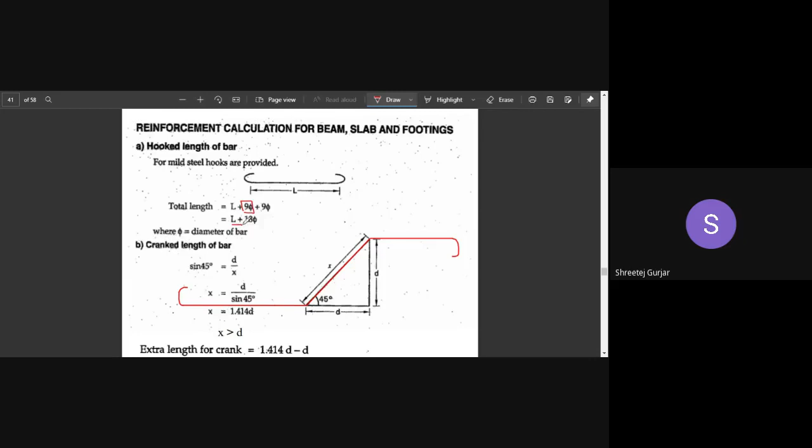Remember the length of a bar, a straight bar. It is the length of this thing, plus the length of these two hooks. The length of each hook is 9 times the diameter, into 2 because we have two hooks. So the total bar length will be this length plus 18 times the diameter.

Keep in mind this 18 times diameter is required for both sides, for the hooks on both sides.

Then there's extra length because of this cranking. That extra length equals 0.42d. Remember 0.42d, the extra length required because of this cranking up. If you have a two-side crank, then it will be 2 times 0.42d.

Then we have this for the length of your stirrup. It will be 2 times (a plus b). A is this, b is here; a is here, and b is here.

Then this 24 times diameter is your overlapping, for overlapping because of this extra thing you need to do so that your stirrups do not open up. So this is 24 times the diameter of your stirrup.

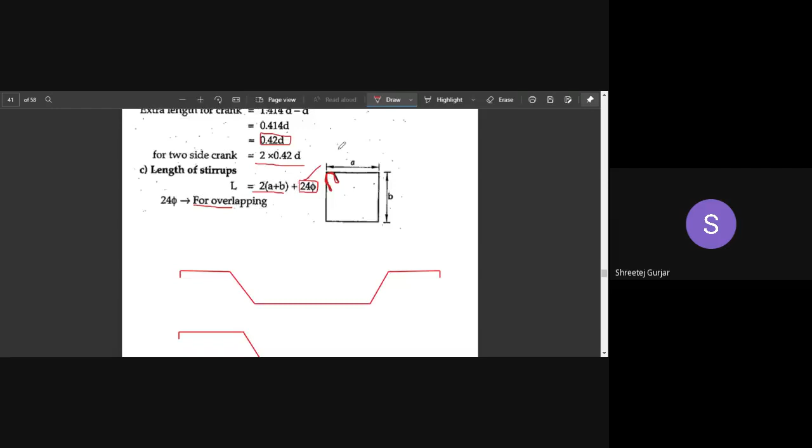So remember this: 18 times diameter, then 0.42d, and 24 times your diameter. Remember these three things that we will be requiring now.

This is your double-sided cranked up bar. Double-sided cranked up bar. This is your single-sided cranked up bar, where only one side is cranked.

In the previous class we discussed this numerical, that is a simple beam. Now we will look into this T-beam.

In figure 1.44, this figure shows a typical RCC beam. This is the longitudinal section. We need to calculate the steel required for the beam diameter wise, and we'll also look into the calculation of quantity of concrete.

They have given us the weight of each diameter bar, weight per meter of each bar, so no need to calculate. Our usual step was d square by 162.2 to get your weight per meter. So that's no need here since they have directly given us the weight in kg per meter of each bar.

They may give this or they may not give this, so you need to remember that formula, d square by 162.2.

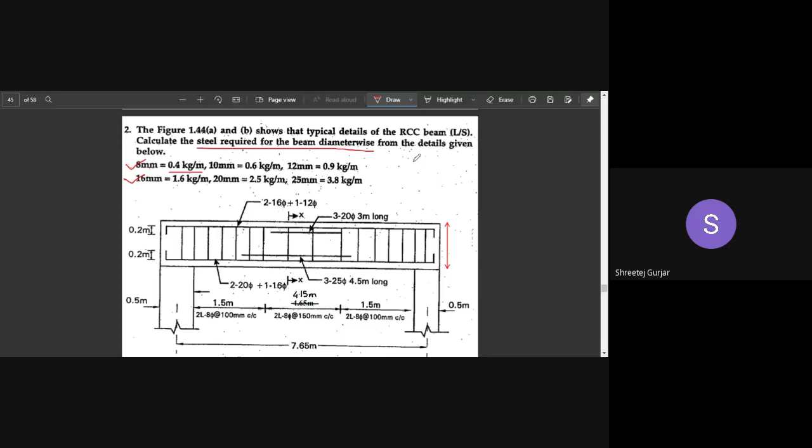Let us look into this cross section and the longitudinal section of your beam. This is a longitudinal section, this is our cross section. You can observe, this is your beam, and we have this bar.

At the top these are usually your hanger bars. Hanger bars at the top: they are 2 bars of 16 mm diameter and 1 bar of 12 mm in diameter.

Let us look into the cross section, you will understand. So 2 bars of 16 diameter are here at the ends, one here and one here, and 1 bar of 12 mm diameter is at the center.

So we are done with this bar. Coming to our bottom bar, this bar is also straight, no cranking up. It is 2 bars of 20 mm diameter plus 1 bar of 16 mm diameter.

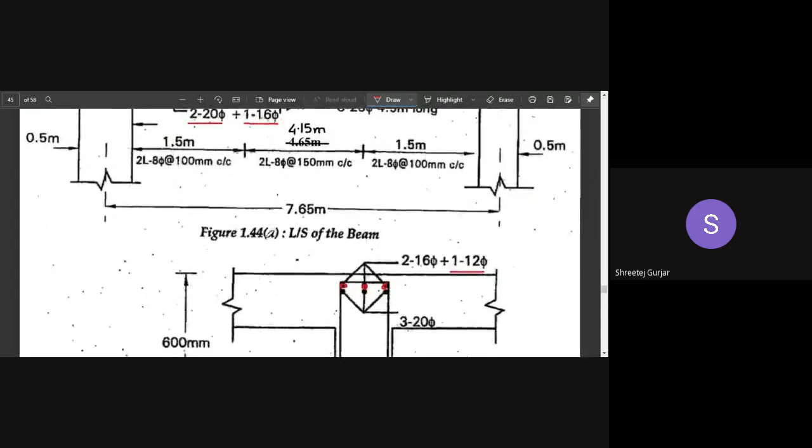Similarly we are arranging: 2 bars of 20 mm diameter are arranged at the sides, and 1 bar of 16 is arranged at the center, placed at the center.

The overall depth of this beam is 600 mm, including the covers, and the width of your beam, including covers, is 230 mm. So this is regarding our cross section.

We can see we have these extra bars: 3 bars of 20 mm diameter and 3 bars of 25 mm diameter, which are straight bars. At the top we have 3 bars of 20 mm diameter, but they don't go throughout the beam - they are only 3 meters long, starting from here, ending here.

At the bottom also you can observe we have this bar, 3 bars of 25 mm diameter, and it is 4.5 meters in length. They don't go throughout, they are only placed here, because at the central span we have more stresses.

Coming to some beam dimensions: this overall depth is 600, as you have seen in the cross section. Then this bearing - you can observe it is 0.5 meter on this side, and also this support or bearing is 0.5 meter.

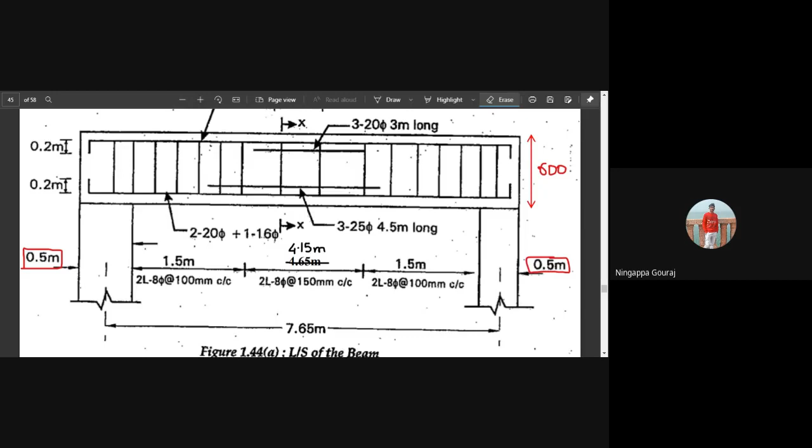Any idea? The load is transferred at end sections. Sorry, I didn't get you. At the end of the beam, sir, load will be transferred more, sir.

Yes, exactly. So at the supports, your shear force will be more. So what we need to do is provide extra reinforcement here, so the spacing is less. At the center span, the shear force will be lesser compared to the support, so spacing can be increased over there. You could provide the same spacing throughout, but it will not be economical. By varying it, we can save some reinforcement.

What we do is change our reinforcement spacing. At the center, the spacing is more, and at the edges, the spacing is different.

That spacing is mentioned here. You can observe the stirrups here are two-legged, 8 mm diameter bars, with spacing of 150 mm center to center. It starts from here and ends here.

At the edges, I mean at the supports, the stirrups are two-legged, 8 mm diameter, with spacing of 100 mm center to center. Starting from here and going up to here - that is your stirrup, starting here and ending here. So, 100 mm at the supports and 150 mm at the center.

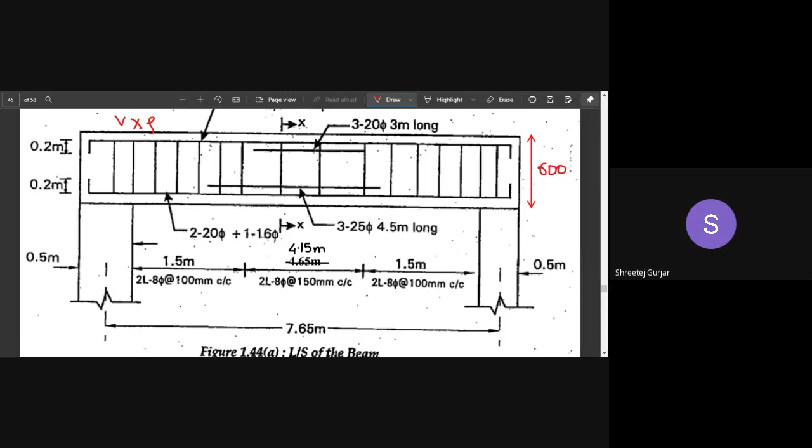Now next we need to calculate the length of your stirrups and the number of stirrups required. If you do all of these things I mentioned, this numerical will be over - you need to calculate all those things and prepare a bar bending schedule. So that is regarding this numerical. Let us look into detail how we do all those things.

Top and bottom cover is not given. So in the previous numerical also, the top and bottom cover were not given, so usually we assume a cover of 25 mm for beams. Similarly here also, we will assume a cover of 25 mm. You can observe here, 25 mm cover we have assumed, because this cover is not given.

So next thing we'll look into. I hope the cross section is clear. So this cross section is at XX, meaning the cross section is at here. XX section is over here.

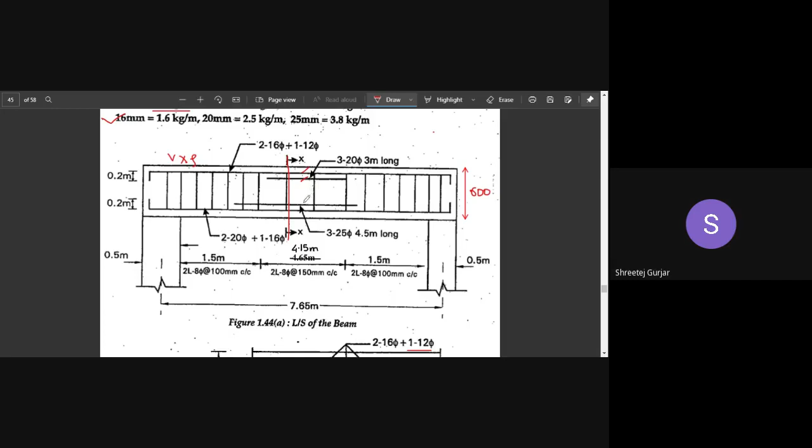So it will include your top bars, this 3 meter extra bar at the top, 4.5 meter long extra bar at the bottom, and this main bars. So all of this is done. I hope this section is clear. So moving on to the solution.

Moving on to solution. So length of the straight bars, I have told you we need to calculate the length of straight bars. So at the bottom and at the top, both are same, no cranked up bars. So directly you can calculate the length of your straight bar.

Let me just show you over here. So length of straight bars starts from here and ends here. So this center to center, we have 7.65.

So we need to add this bearing, half of this bearing over here, which is 250 mm, and then half of your bearing here, that is 250 mm we need to add. Then you need to minus this cover, minus this cover over here 25 mm, minus this cover over here 25 mm. So we'll get your straight length.

Then what you need to do, you need to add this hook length, that is 0.2 over here and 0.2 over here. So you get the total length of your bar. So that is what is given over here.

7650 center to center length plus your two bearings, then this is for your cover, reduction for your cover, plus 2 for your 2 into 200 for your hook length, which they have given. So you get the total length of a straight bar as 8.5 meter. So this is done.

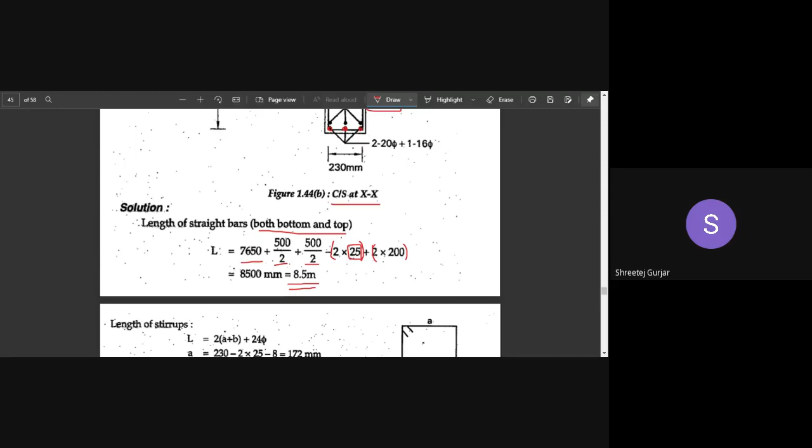Then top bar and bottom bar are same, so length of your bars are the same at the top and bottom. So we are done with this. Now the main thing is length of your stirrups.

So it will be length this A, and then this is B. So 2 times, A is 2 times over here and B is also 2 times. So 2 times A plus B plus 24 diameter, 24 into diameter of your stirrup, that is for this hook length.

So this A distance will be minus your cover, minus your cover and half of your diameter minus here and half of your diameter of a stirrup over here. So width of my overall beam is 230 mm, as seen in the cross section, and then minus 2 times cover on each side, minus cover over here, minus cover on this side. And then half of your diameter you need to reduce over here.

Half of your diameter you need to reduce here because A and B are center to center length, they are center to center length. So you need to consider from the center of your stirrup. So it will be minus 8 by 2 and minus 8 by 2. So directly they have written minus 8. So A is 172.

Similarly, B you can calculate, starting from this and ending at here, center to center length. So it is 542. Then you can calculate this length of your stirrup, so it is 1.62. By substituting in this formula, you will get this 1.62 meters. So length of stirrup is done.

Now the next thing that we are left out with is the number of stirrups, the last thing. So I've told you need to calculate separately for your center span and then separately for your supports.

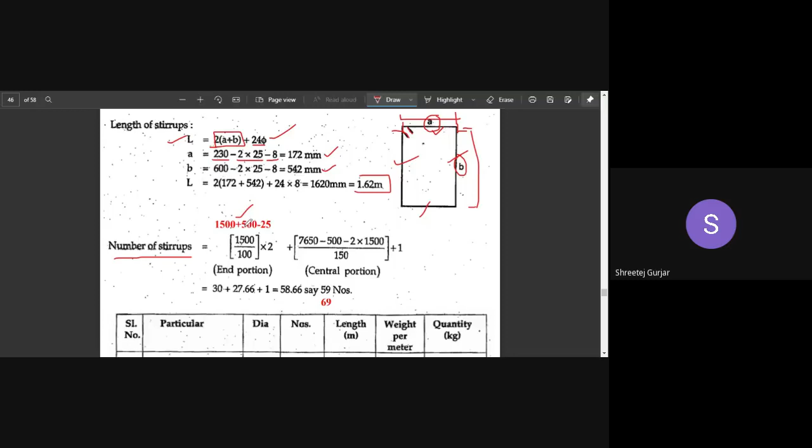So this is for a center span. Sorry, this is for your supports. This is for supports, and not for center span. This is for a center span.

So let me just show you here. The length will be starting from here. For your supports, the stirrups will start from here and end over here. So you need to calculate this length, starting from here and here, ending till here.

So we know this is 1.5 till here, 1.5. So you need to add this bearing length, that is 0.5, and then reduce your cover. So you will get your length that is required for your spacing. Then this is on one side, and you have same thing on the other side.

You have the same thing on the other side, so you have to multiply that by 2 because we have one side over here and a second one over here. So the length will be 1.5 plus 0.5 minus 0.025, that is your cover minus your cover. So 1500 plus 500 minus 25. That is your length into 2, right? Divided by the spacing, and then you need to multiply by 2 afterwards.

So that is the length of your stirrup spacing, and then the spacing which is given, S, is 100 mm. So this length which we have calculated, you have to divide by 100 mm, and then overall you multiply that by 2. So you'll get the number of stirrups. That is what we have done over here, right? So do not follow this, use this over here.

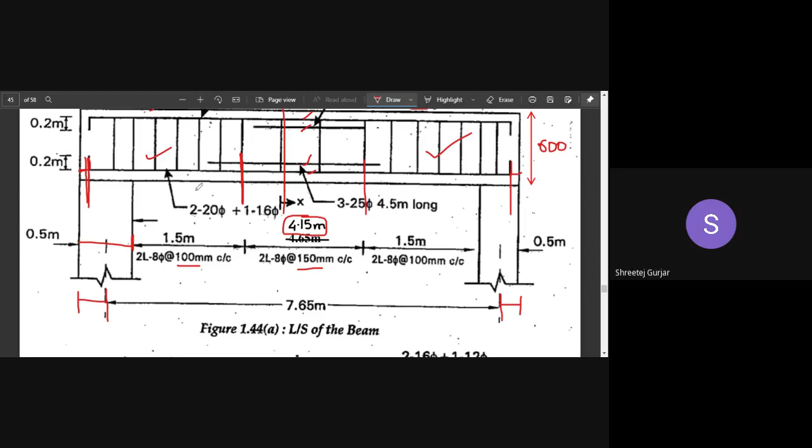4150, and then divide by 150 mm, which is your spacing, right? So the length is directly given here, this is the length, and then divide by the spacing that is there. No need to multiply by 2 because it is only 1. So divide by 150, and then you need to add 1. You need to add 1 compulsorily whenever you want to calculate the number of stirrups.

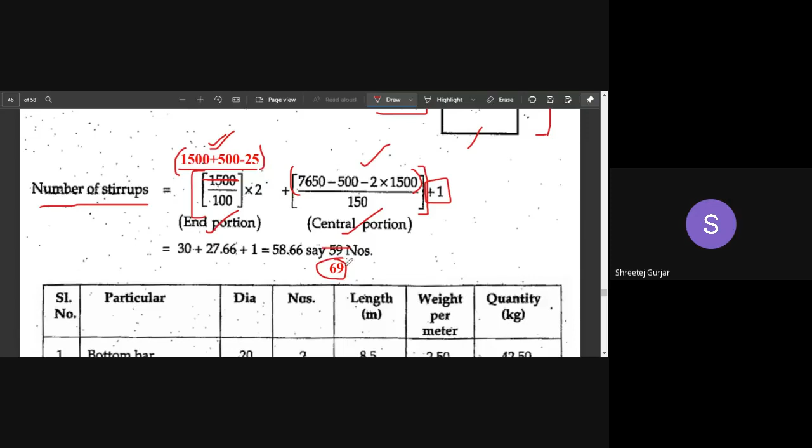So the number of stirrups you get is 69, okay, not 59, because they have used 1500, which is wrong. So if you use this, you will get the number of stirrups as 69. We will use 69 number of stirrups.

So moving on to the table, I hope all the calculation is clear. If you have any doubts, if you want me to explain any of the things, please let me know.

So the next thing is preparing your schedule. Your top bar and your bottom bar are same in length, but the diameters are different. So we'll start with the bottom bar.

2 number of 20 mm diameter bar plus 1 number of 16 mm diameter bar, that is placed at your bottom. We will write separately for diameter, like this: 20, then 16. The larger one you write at the top, and the smaller diameter one you write at the bottom. At the ends you have 2 number of 20 mm diameter, and at the center you have 16 mm diameter bar. So this is at the bottom.

Then the length we have calculated is 8.5, and the weight per meter is directly given in your problem statement, so you write that over here. Then when you multiply number into length into weight, you get your quantity in kg. Similarly for this 16 mm diameter you can do the same.

Then for your bottom extra bar, there is one extra bar, which is 4.5 meter in length, which you can see in your longitudinal section. Diameter of that bar is 25 mm, and 3 number of bars are provided. This is also given, so you can get the quantity in kg.

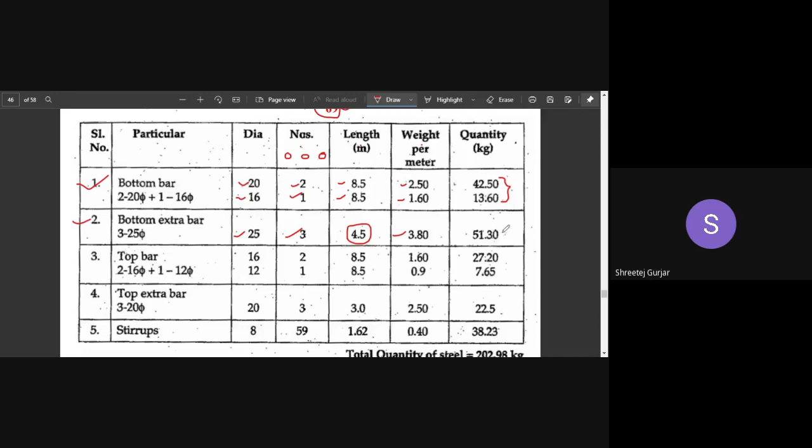So after we have done with the bottom bars, we can go ahead with your top bars. We will calculate for top bars similarly: 2 bars of 16 mm diameter at the ends, and 1 bar of 12 mm diameter at the center.

So diameter you write the number, and this is your length of the bar, and this is the weight per meter which is given. You can calculate this. Then top bar, 3 bars extra at the top we have been given at 20 mm diameter, 3 bars of 3 meter in length. Then stirrups we have calculated, number of stirrups is 69, and this is 8 mm diameter stirrup, and the length of each stirrup is 1.62. This is the weight per meter. You will get all these quantities in kg.

Summation of all these quantities will give you the total quantity of steel that is required. It is 202 kgs, okay, for one beam you can observe, for a single beam of almost 8 meter span, 8 meter length, so the steel that you require is 200 kilos. So this is a numerical regarding beam. If you have any doubts, please feel free to ask.

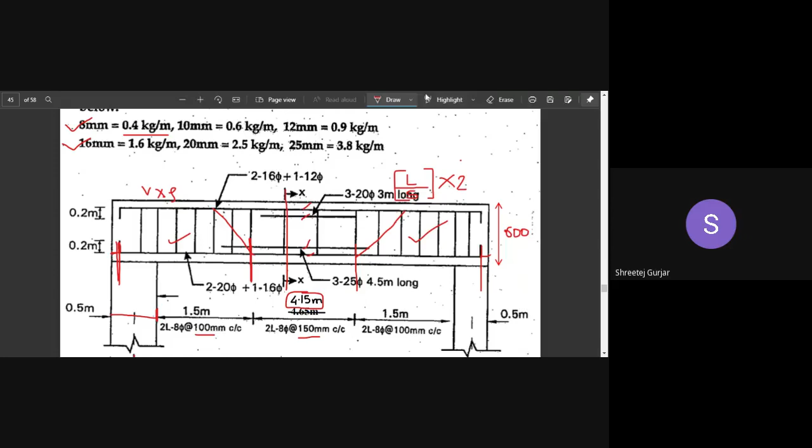Okay, so this is a very simple one wherein we do not have any cranked up bars, like we had in the first numerical. This is very easy when there is no cranking up.

So whenever you have a cranked up bar, you need to mention them separately. Do not forget to mention them separately. I hope this is clear.

So moving on to the next thing, we will look into the calculation of a slab, calculation of reinforcement in slab. This is very important, so engineers usually go for a slab checking.

Reinforcement checking for slab is done before the casting of slab concrete. Structural engineers who have given the structural design usually go for the slab reinforcement checking. So you need to be thorough with this, because it is very confusing if you just go through it.

You need to properly understand where these cranked up bars are, what is the length of these cranked up bars, what is the length of your cranking up. Then extra bars will be provided at some places, so you need to understand all those things. Initially it will be a bit confusing, but later on you will properly understand.

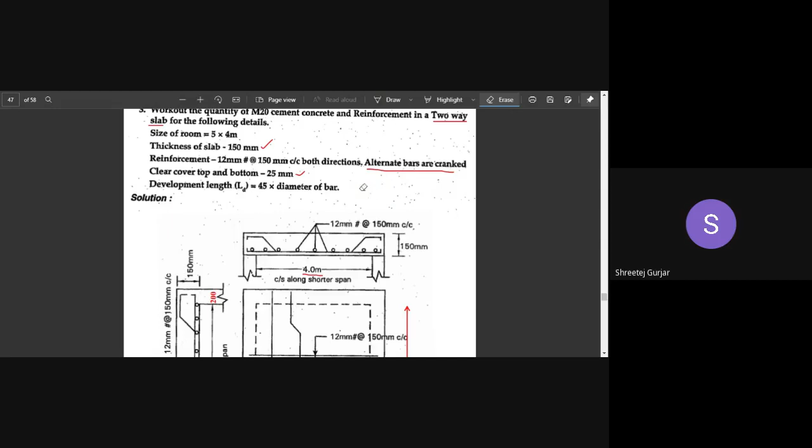I hope the problem statement is clear. Let me just explain this cross section. This is your plan view, and as I've told you, this is the reinforcement given along the longer span. The reinforcement given along the longer span is this, which I am drawing over here.

So alternate bars are cranked up. We need to calculate the length of this straight bar, and then we need to calculate the length of this cranked up bar - this is for the longer span. Then moving on to the shorter span - this is the bar provided along your shorter span, and alternate bars are cranked up here too. So we need to calculate the length of this straight bar, and we need to calculate the length of these cranked up bars.

So separately we need to calculate all of this, and then we need to prepare a table. No stirrups over here—obviously this is a slab, so no stirrups. So only your reinforcement bars we need to calculate over here.

So this is the cross section along your longer span. These bars will be at the bottom, and these bars will be at the top.

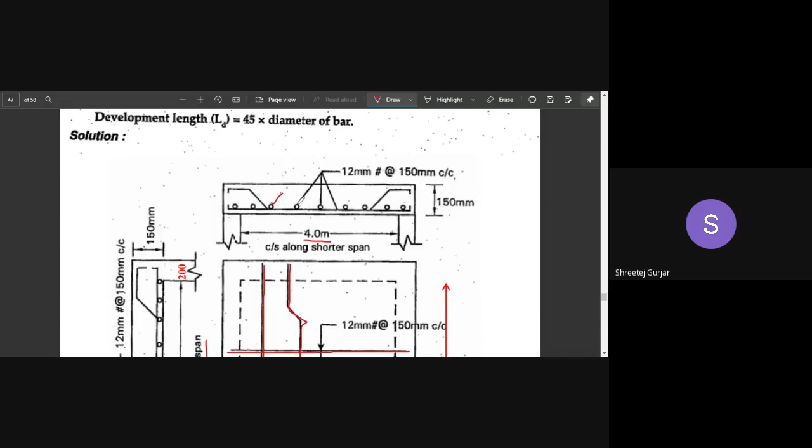And in your cross section of the shorter span, the bars which are going in the longer span will be seen in this circular shape, and the bars going along the shorter span will be seen as a straight line. I hope this is clear.

So moving on to the calculation part. They have mentioned we need to calculate the quantity of M20 cement concrete, along with your reinforcement.

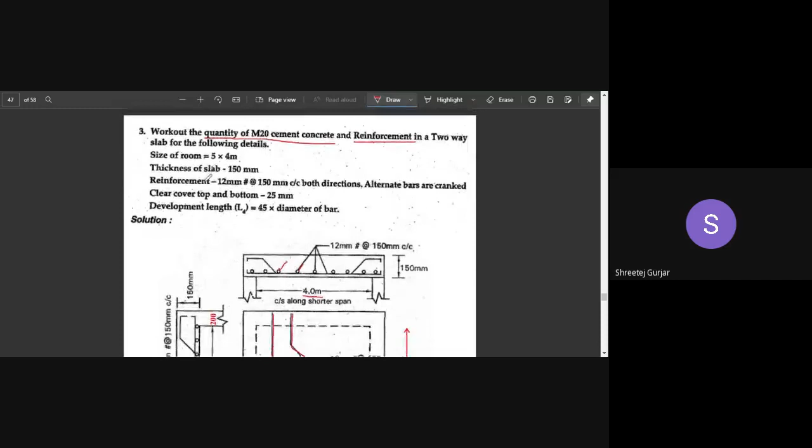First we will calculate the quantity of concrete, that is nothing but volume into density. The length of the slab totally is adding up your bearings, so the length will be 5,400. The breadth of the slab is 4.4 meters, and the depth of the slab is 150 mm, so this is not 0.5, it is 0.15.

So multiplying length into breadth into depth, and multiplying that by the density of concrete, that is 24 kilonewton per meter cube, you will get the total quantity of M20 concrete. So length into breadth into depth into density of concrete gives you the quantity in kg.

So moving on to the next thing, that is reinforcement bar calculation. First we will calculate the reinforcement along the longer direction. So what I've done is drawn this figure over here.

You can observe, so we need to calculate the length of these bars. This is your 5 meter length, which is the slab length, the longer length. So we need to calculate the bars which are along this longer length. Do not be confused whether we need to calculate this direction bars or the other—whichever is the longer length, that length we need to calculate.

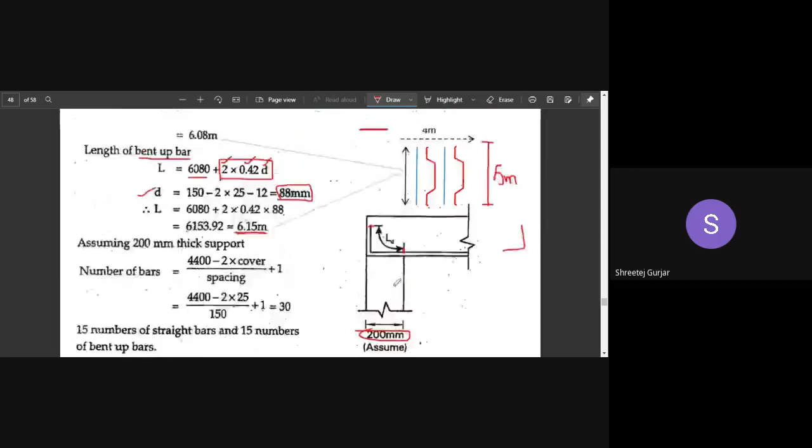So we need to calculate the number of bars, right? Along this way, we need to calculate how many bars can we fit. Okay, so we need to use 4 meter, right? We do not use 5 meter while calculating the number of bars. We use 4 meter because bars are placed along your 4 meter, not along this direction.

So spacing is 150 mm, right? They have given the spacing as 150 mm. So the overall length of your slab is 4 meter in distance, plus your bearings on both sides, right? 200 mm plus 200 mm. So 4 meter plus 0.2 plus 0.2 will give you 4.4. That is 4,400 mm is the overall length of your slab.

So minus the cover, right? Minus this cover over here and minus the cover on the other side. Suppose this is 4 meters, so minus cover on this side. So this overall length is 4,400 minus 2 times your cover, right? And divided by spacing, and plus 1 always, because whenever you are calculating number of bars, you need to do plus 1.

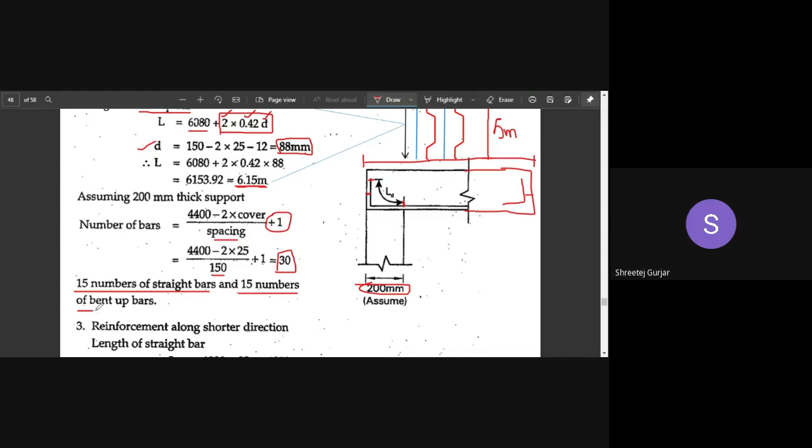So calculating, we get 30 number of bars are required. Okay, 30 number of bars are required. So total number of bars are 30, and in that 30, 15 number of bars are straight bars, and 15 numbers of bars are bent up bars. Okay, so I hope this is clear. This part is clear for your longer direction.

Similarly, we will calculate for shorter direction. Okay, similarly, we will calculate for shorter direction. So I hope this is clear. Calculation of your reinforcement along longer direction. So if you have any doubts, you can let me know.

Okay, so do not confuse this longer direction and shorter direction. If you understand clearly which bar you need to consider in longer direction and in shorter direction, rest of the things are same, just calculation part. But do not mix up this longer and shorter bars, okay, while calculating.

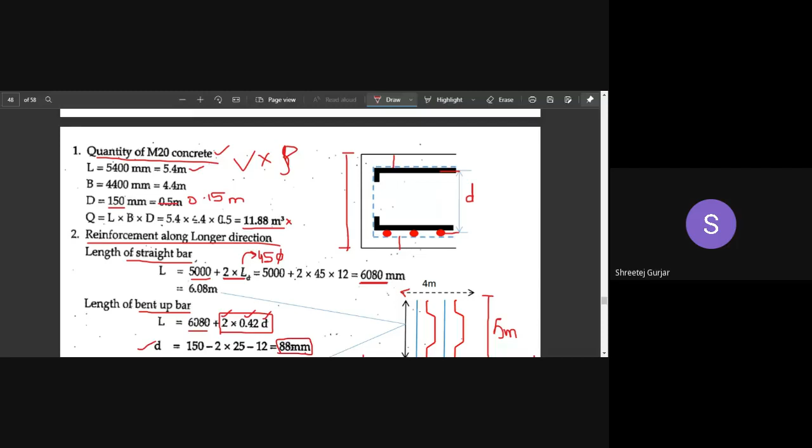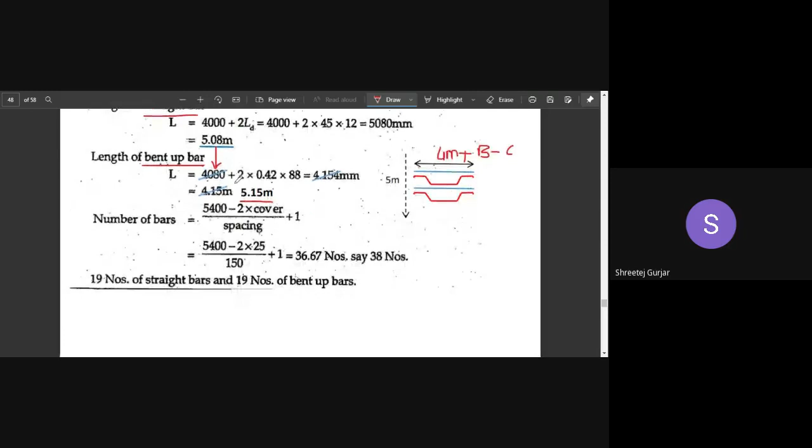So calculating the number of bars, we need to consider this length, that is 5 meters, plus your bearings on each side you need to add, that is 400mm, and minus 2 times your cover, divided by spacing. Spacing is 150mm, same as along your longer direction, plus 1. So we get 38 number of bars.

So half of the bars will be straight, and half of your bars will be bent up bars. So I hope this is clear. Moving on to your table calculation, or your schedule preparation - for longer direction you need to mention separately, and for shorter direction you need to mention separately.

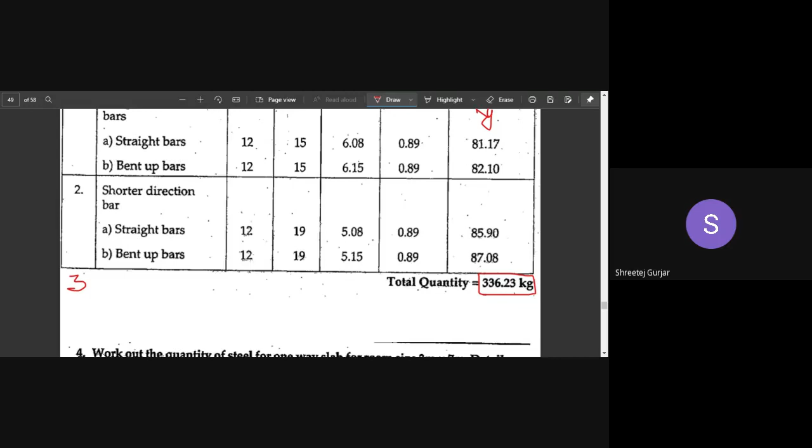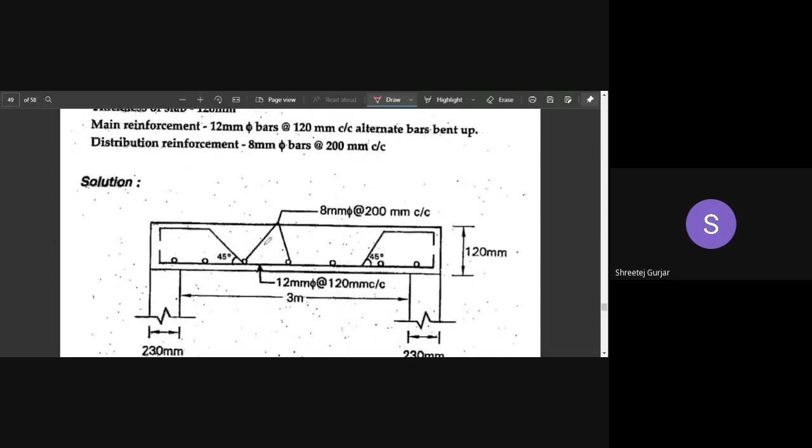I'll send you a few more numericals for practice for your slab reinforcement calculation, and you can solve those. If you have any doubts, you can let me know, or else we will just move on to the next problem, which is a homework problem. You can try and solve this as homework, and if you have any doubts regarding this, you are free to ask me.

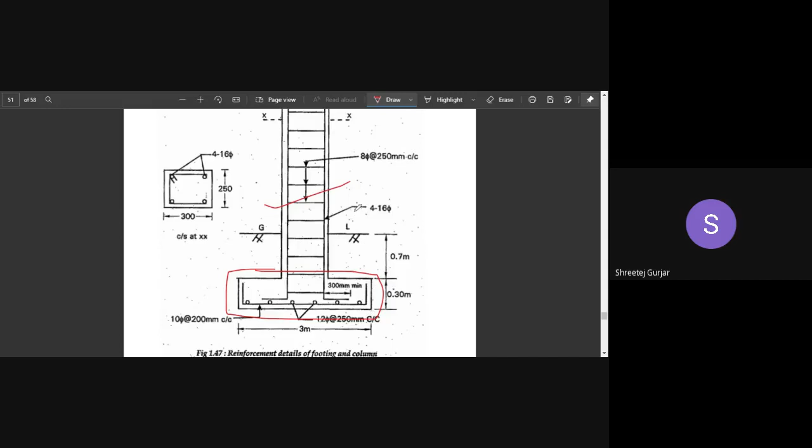So this is for homework, and this numerical is for an isolated footing and column, combined. We will calculate the reinforcement for your column. For a column here, you can see your column, and then the isolated footing which is provided for it. So we will look into how do we calculate the reinforcement and prepare a table for an isolated column with footing. Now let's look into the problem statement.

Work out the quantity of M20 cement concrete, we need to calculate, and reinforcement in an isolated footing and column for the following data.

So the footing size, details of footing, it is 3 meters by 2.5 meter, and this is the thickness of the footing. The reinforcement that they have provided in the footing: 12 mm dia bars at 250 mm center to center along the shorter direction, and 10 mm dia bars at 200 mm center to center along the longer direction. I have drawn this figure so you have an understanding of which is the longer direction and which is the shorter direction. This is the longer direction, which you can see it is longer - this is 3 meters, and this is 2.5 meters.

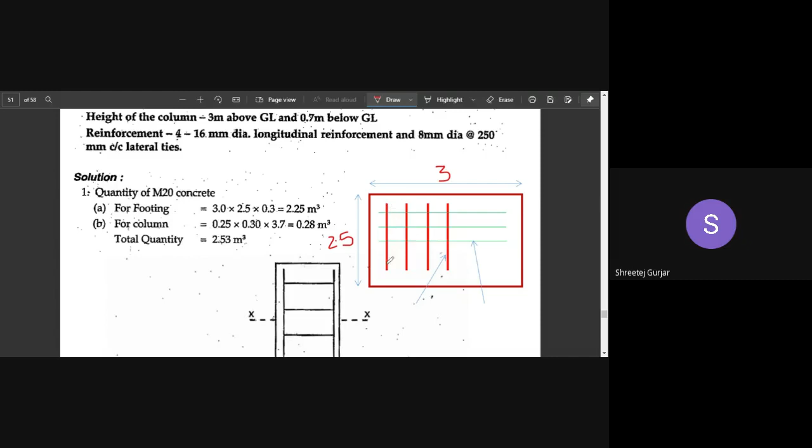So what they have mentioned: 12 mm dia bars at 250 mm center to center along the shorter direction. So this is along the shorter direction - 12 mm diameter bars at 250 mm center to center spacing.

And then 10 mm dia bars at 200 mm center to center along the longer direction. So this is the longer direction bar - 10 mm in diameter, and the spacing is 200 mm. So this is just for your reference which I have drawn.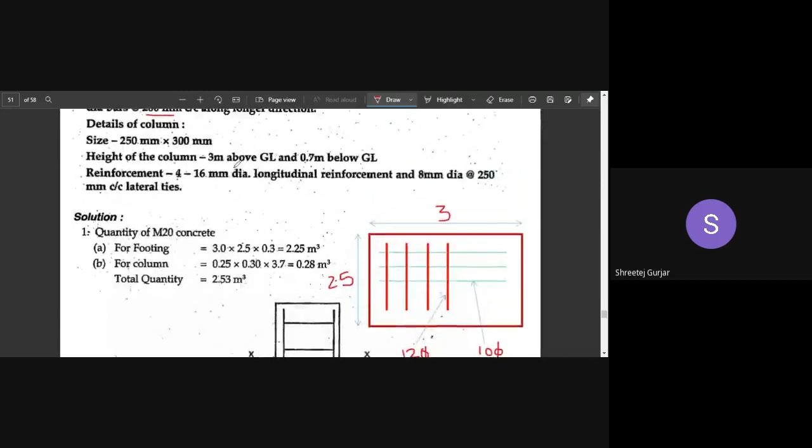The next thing that they have given is details of your column. The size of your column is 250 mm by 300 mm. Height of the column is 3 meters above the ground level and 0.7 meter below the ground level. You can observe here: from here to here it is 3 meters above your ground level, and below your ground level, the column is 0.7. This is mentioned over here - 0.7. And this is your footing depth, which is 0.3.

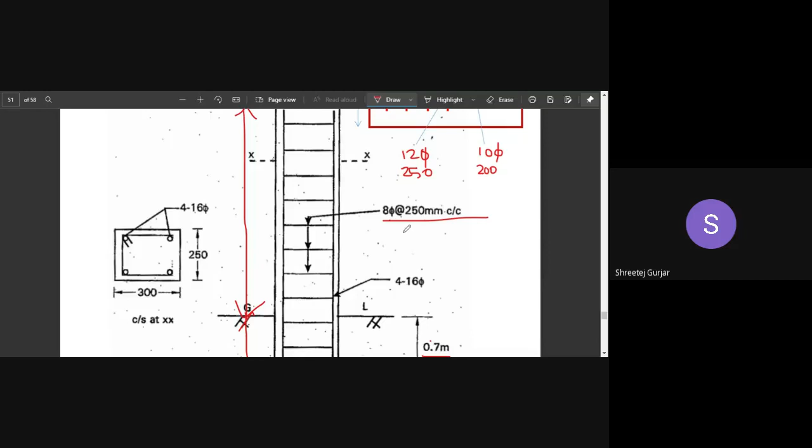In the column we have four bars of 16 mm diameter as longitudinal reinforcement, and 8 mm diameter bars at 250 mm center to center, which are your lateral ties. These 4 bars of 16 mm diameter are provided at the corners, and the size of our column is 250 by 300. The lateral ties provided are 8 mm diameter, and the spacing between each lateral tie is 250 mm center to center. This is your cross section which they have given of your column and footing.

You can observe these bars from your column. A bar from your column starts from the top of your column, leaving some cover at the top, and it continues continuously.

It is going into your isolated footing, and it is bent up like this. This bent up length is 300 mm minimum, as told. We need to provide that length as 300 mm, on the other side also same, and along the 3 meter and 2.5 meter directions as well.

So it will be provided like this, somewhat like this. At the top, if you observe, it will be provided like this. This is for your extra thing, 300 mm in length.

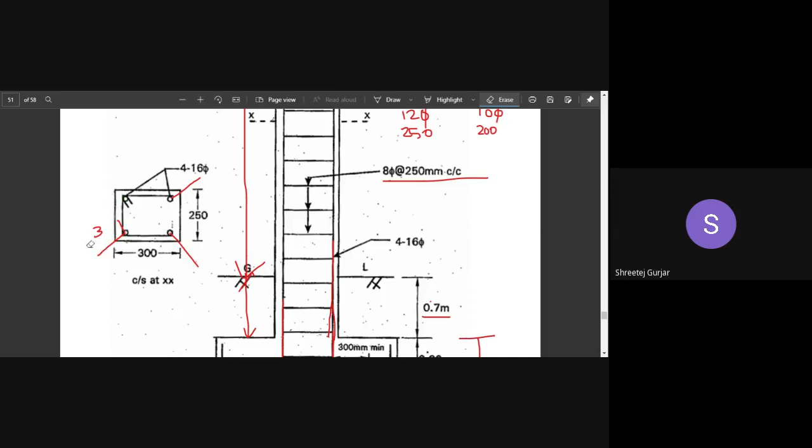From the top, if you observe, this is what you will be observing. So that is there. Then lateral ties is clear, I hope. Then this reinforcement you can observe is there, this is for 3 meters, that is your longer span.

And these bars, which are seen in circular cross section, are for the shorter direction, 12 mm bars, 250 mm center to center. And this 3 meters longer span bars are 10 mm dia bars, 200 mm center to center. So this view I have shown is the plan view of your isolated footing, for footing plan view.

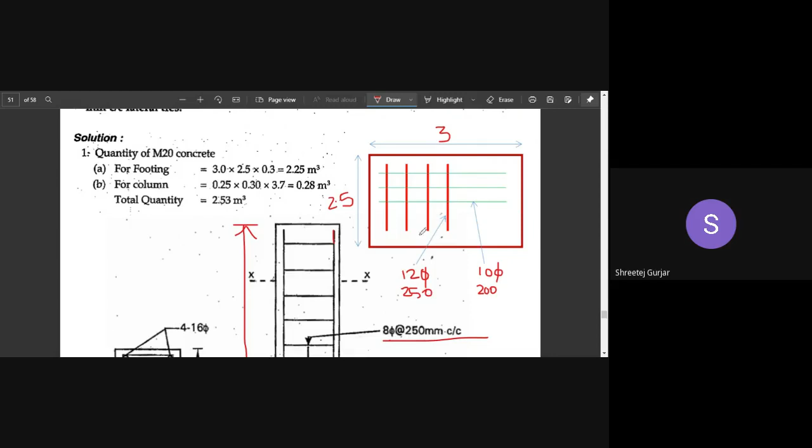So I hope this part is clear. Moving on to solution. So for M20 concrete, we will calculate quantity of concrete separately for footing and separately for column. So volume is length into breadth into depth, so we get in meter cube, and if you multiply by density, you will get in kg.

Next for column, the height of your column is 3.7 meters - 3 meters above ground level and 0.7 meters below your ground level. And this is the cross section of your column, that is 0.25 into 0.3. Then total quantity you can calculate in meter cube, and if you multiply the total quantity by density of concrete, you will get the quantity of M20 concrete in kg.

So I hope concrete calculation is clear, very easy, right? Moving on to reinforcement calculation, which is the important thing over here. You need to calculate reinforcement.

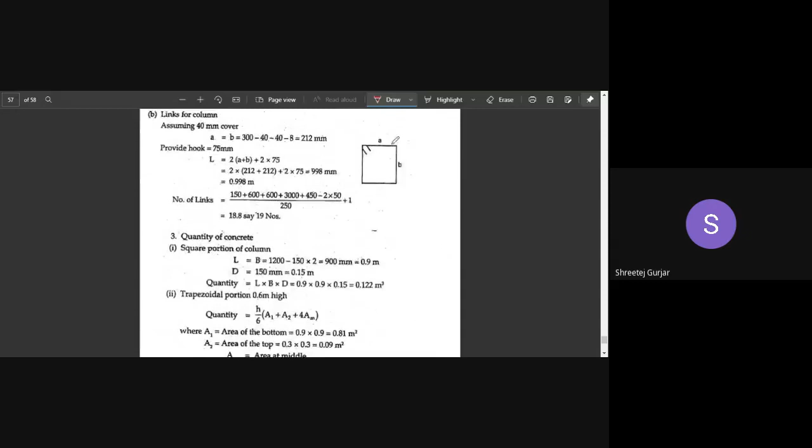Okay, we shall continue with this numerical. Now we will calculate the footing reinforcement that is required first, and then we will calculate the reinforcement required for your column - footing separately, column separately.

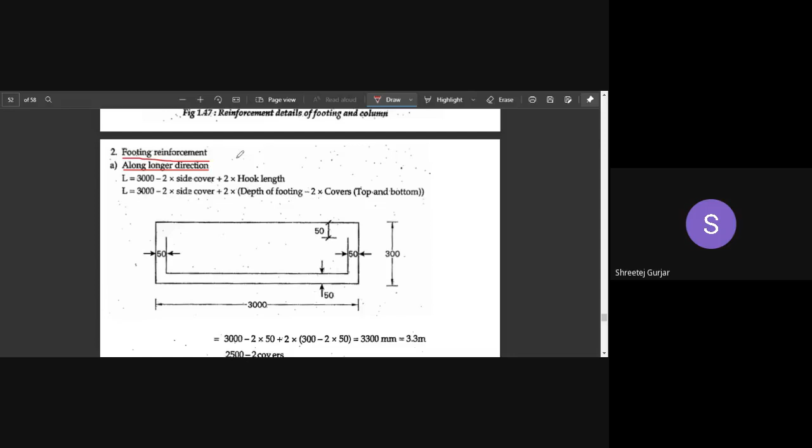So for footing along the longer direction, it is nothing but just like a slab - along the longer direction and then along the shorter direction. So this figure which they have given is for the longer direction, 3000 mm. So this minus your two side covers you need to do, and then you need to add this hook length, from here to here. So two hooks we have, so into two, into hook length.

So 3000 minus two side cover into this hook length, how do we calculate this? This hook length calculation is based on the overall depth, which we have as 300 mm. 300 mm minus this cover at the top and minus this cover at the bottom, so we'll get this hook length.

So the depth of footing is 300 minus cover 2 into 50 - that is the top and bottom cover. So you get the length as 3.3 meters as the length of this bar. So this bar is 3.3 meters in length, and this is along the longer direction.

Now coming to the spacing or the calculation of your number of bars. For number of bars, you need to consider the opposite direction length. So it is 2.5 meters minus 2 covers, that is 50 one side and 50 other side, divided by the spacing of your bars, that is 250 mm, plus 1. Always you have to do plus 1. So the number of bars you will get as 11, that is along your longer direction.

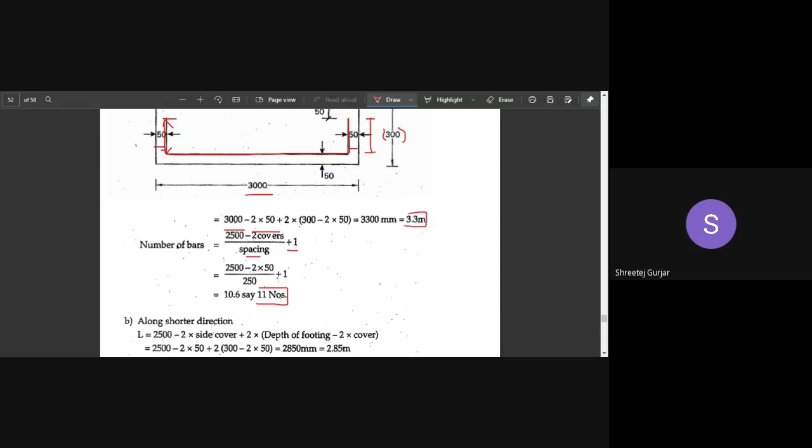Moving to the shorter direction in your footing, similarly you can calculate the length, and then similarly you can calculate the number of bars required. The only change here is you need to use 3000 mm, and the length over here is 2.5 meters, not 3 meters. The rest of the things are the same. You will get your length and you will get your number of bars. You can observe here it is 11 number of bars, and here in shorter direction it is 16 number of bars.

Moving on to the next thing, after we are done with the footing, we need to calculate the reinforcement in column. So the longitudinal direction reinforcement bars, that is your vertical bars - this vertical bar that I have shown you in the cross section before - it starts from the top of our column, goes inside your footing, and then this extra length which is 300 mm. So this total height you need to consider from here to here, and then you need to add this side length, that is 300 mm you need to add.

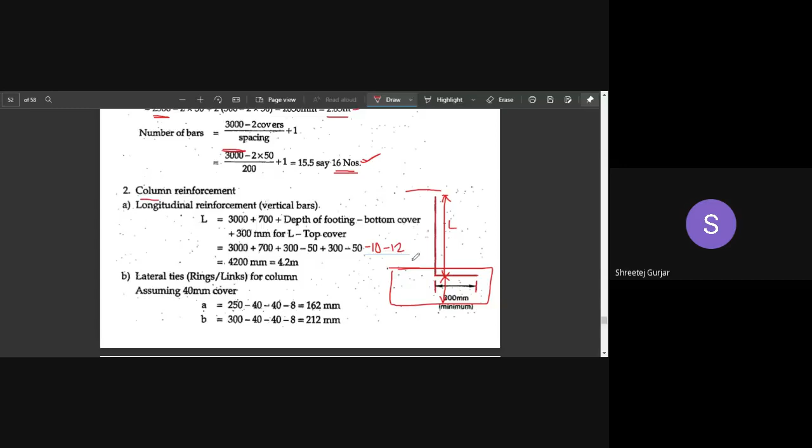So how can we calculate this length? From top, suppose this is your column. So this cover we need to minus over here, and then some footing depth is there. This is your footing, so we need to minus some amount over here. That is how you can calculate. So let us just look into it in detail in your cross section.

So this length, we know we need to calculate this length from here up to here. So this overall depth, we know overall depth is this 3 meters, plus 0.7, plus this 0.3. So this is the overall depth which is shown here, and we need to minus this length.

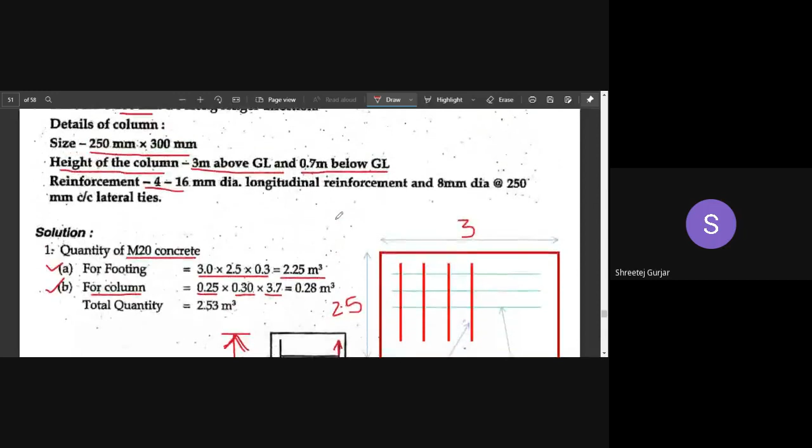At top we have one cover, so minus cover - how much we have assumed? I think we have assumed a cover of 50 mm. So cover at the top, we need to minus 50, and minus 50 cover at the bottom. And then we need to minus this diameter of this bar, that is 12 mm, minus 12 mm, minus this bar diameter, which is 10 mm. Then you will get your length of your bar.

Let me just write this. So overall depth of your column is 3 meters, which is 3000 mm, plus this 0.7 and 0.3, which is 1000 mm. Then minus cover at the top, which is 50, and minus cover at the bottom, which is 50. And then minus this diameter of the bar, that is 12, and minus diameter of this bar, which is 10 mm. So this is how you can get the length of your straight bar. And to this, what you need to do is add this length, which is 300 mm plus 300 mm.

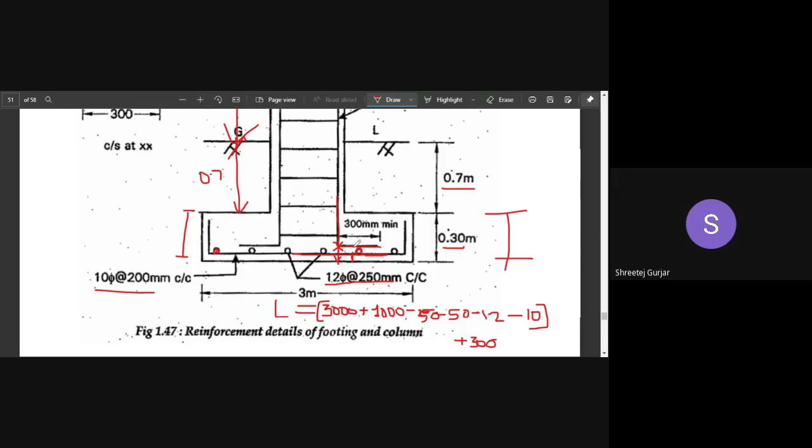I hope this calculation is clear. So this is how you can calculate the length of your longitudinal reinforcement. They are 4 in number, one at each corner. Overall you have to multiply by 4, but this will be done later when you prepare your schedule of bar bending. We need not multiply by 4 now. So this is the length of your individual bar, how we can calculate it.

So that is what we have done here. You can observe, 4.2 is the length of your bar, this total length starting from top and going up to here.

Now we are left with lateral ties, which are provided like this for your column. We need to calculate the length of those lateral ties plus the number of lateral ties required.

We will assume a cover of 40 mm for your column. So this cover, on this side and this side, it is 40 mm and 40 mm.

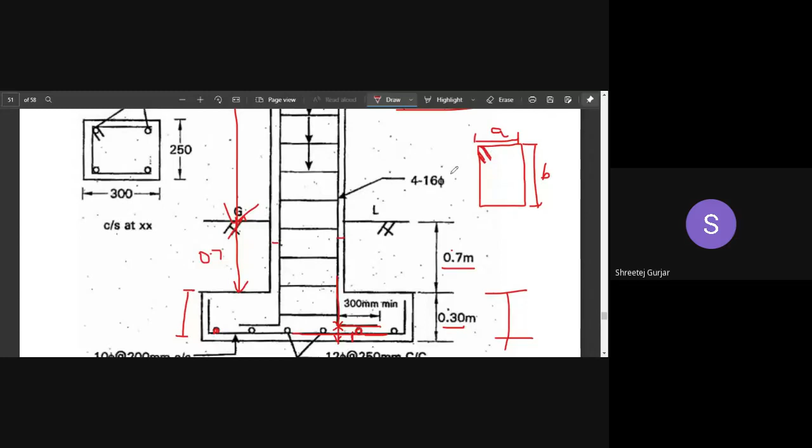So what do we need to calculate? Similarly to how we calculated for stirrups, we need to calculate this A, and then this B. We need to calculate A and B similarly, and then we need to calculate the extra, which is your development length.

A is equal to 250, which is the width of your column, minus 40 cover on each side, and minus the diameter, which is half of the diameter of this bar. We need to subtract that, so we get the A length as 162.

Similarly, we get the length of B. This is A, and this is B, which is 212 mm.

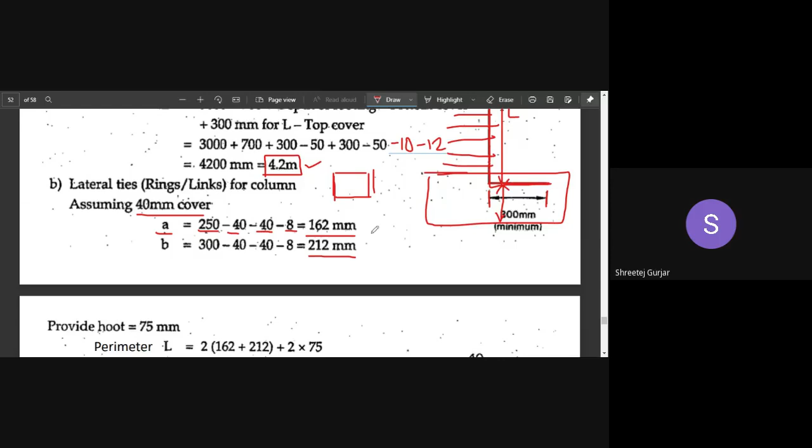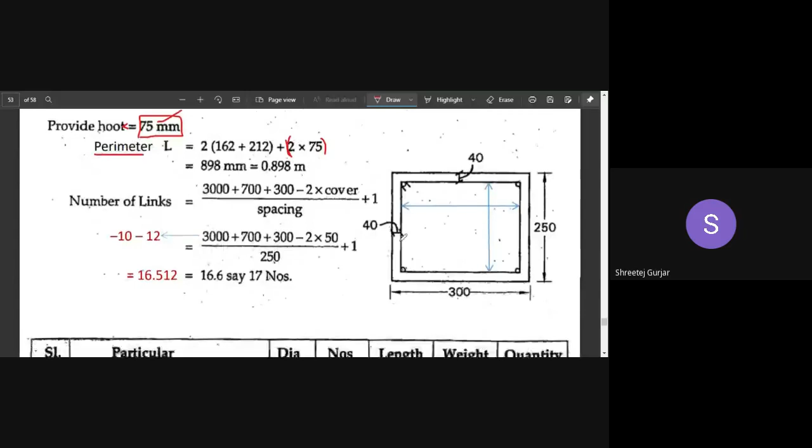This is the hook, provided as 75 mm, and we provide 2 hooks. This is the development length I'm talking about, which we provide so that the lateral ties do not open up. This length we consider as 75 mm on each side, so into 2 because we have 2 hooks. So the perimeter, that is the length of your lateral ties, totally comes to 0.898 meters.

Next we need to calculate the number of lateral ties required in your column. First we calculate the length of your column, and then divide by spacing to get the number of links.

What is the length of your column, or the distance over which we provide stirrups? It starts from here and ends up till here. That is the same length we have calculated previously, shown in the square bracket.

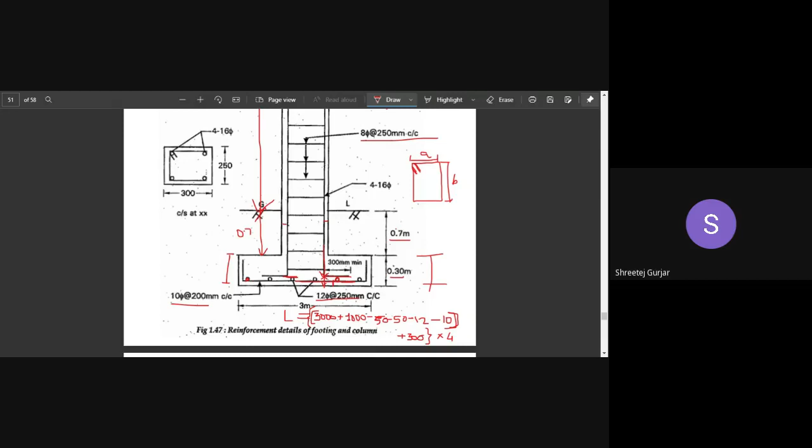We use that length and divide it by spacing, which you can observe here is 250 mm, then add 1. This gives the number of lateral ties required, which is 17 in number.

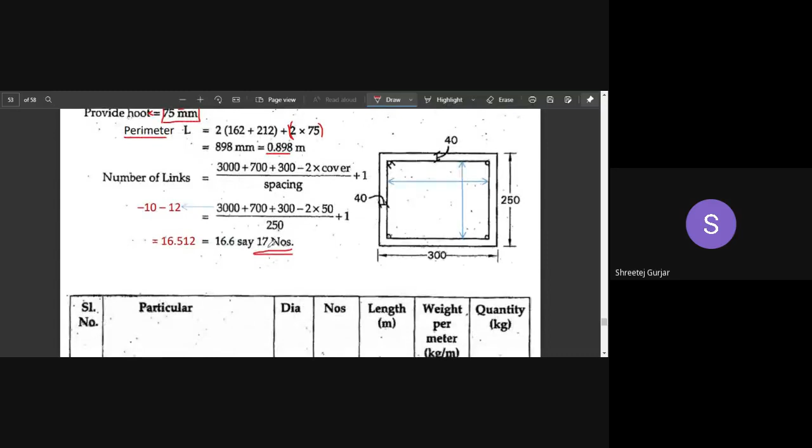I hope all the calculation is clear. Similarly, you can prepare this table for footing separately, for column separately, and for footing, the longer direction and shorter direction need to be prepared separately.

In column reinforcement, vertical bars, that is your longitudinal bars which are in L shape, and your rings or lateral ties, need to be written separately. The weight per meter might be given or might not be given, so you can calculate weight per meter by D squared divided by 162.2, where D is the diameter of your bar. Multiplying number into length into weight gives you the quantity in kg.

I hope this numerical is clear. If you have any doubts regarding any of the things in this numerical, please let me know.

Okay, so this is also easy, very easy, right? No cranked up bars and all those things. So just calculation of your length and then preparing the table. So just basic mathematics, and you need to properly observe from where the bar starts, where the bar ends, right?

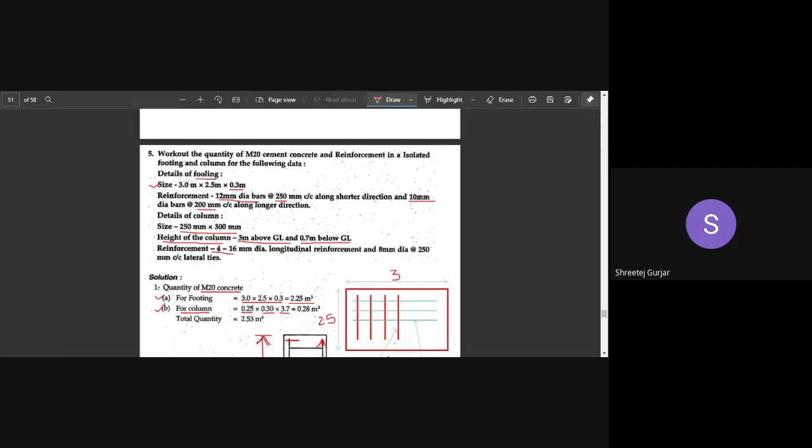That thing you need to keep in mind, and then properly assess your covers, right? For columns, we have separate cover. For footing, we have separate cover, right? As you go below, your cover size goes on increasing, I've told you. So for beam, we have assumed a cover of 25 mm. Now for column, we have assumed a cover of 40 mm. And for footing, we have assumed a cover of 50 mm.

So properly, you need to assume your covers. Okay, if they do not give you your covers, you need to properly adopt cover sizes. So I hope this is clear.

Now one more numerical regarding this column. Okay, similar numerical is there. You can try this for homework. You can practice this, and you will get an idea of how to calculate the reinforcement in column as well as footing. You can try this out. I will send this PDF to you.

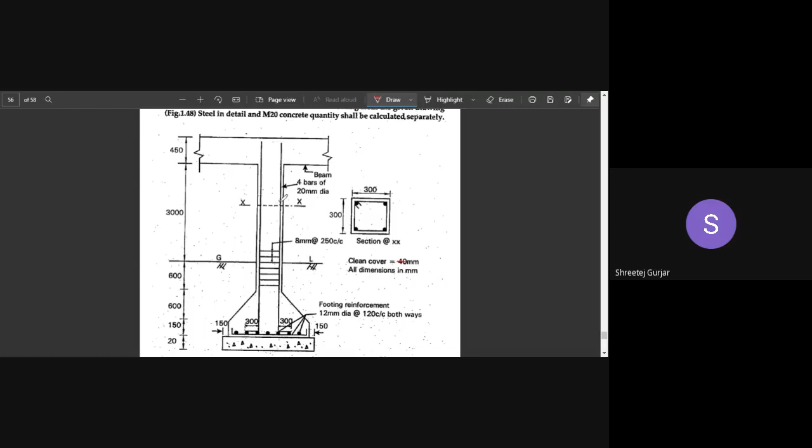So moving on to last numerical. Okay, moving on to last. So you can observe this is also a column and footing reinforcement calculation, wherein your footing you can observe it is a trapezoidal footing, right? It is a sloped footing and not a rectangular box footing. This is a sloped footing or a trapezoidal footing you can observe, and it is also calculation of your reinforcement in column and footing. So let us read the problem statement first.

So prepare a detailed estimate of RCC column and footing. Right, RCC column and footing, you need to calculate detailed estimate from the given drawing. Okay, steel and M20 concrete. Okay, both we need to calculate. We need to calculate concrete quantity as well as steel. Okay, and they should be calculated separately, which they have mentioned.

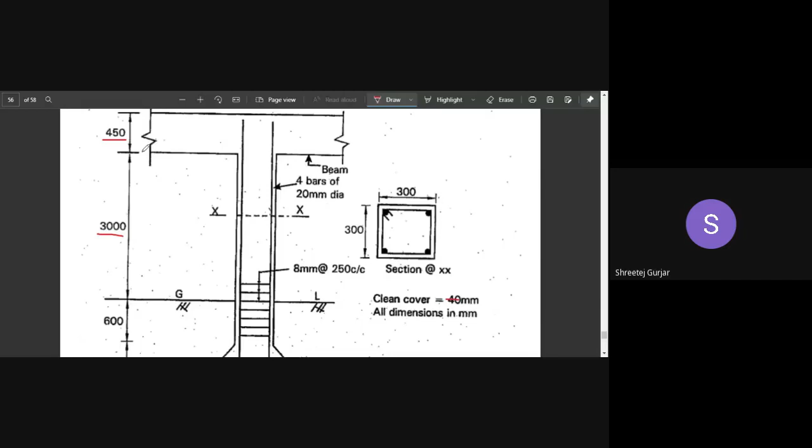So you can observe this is your beam. Okay, this is your beam, and this is 450 mm in depth. The beam is 450 mm in deep and depth, and then this is your column, which is 3000 mm. Okay, 3000 mm up to ground level, and below ground level it is 600 mm, right? 600 mm below ground level up to this footing, and then 600 mm is the slope length, right? It is the length, vertical slope length.

And then this is your footing, right? Up to this it is 150, and this PCC is 20 mm in thickness, 20 mm in thickness. So all of this is given. Then coming to your footing, so 1200, it is the width of your footing in either direction. Okay, either direction it is 1200 mm. Okay, because the column is square, right?

Because the column is square, the footing is also squared. So this is 1200, this is 1200, this is column size is 300 by 300, and if you observe from top, it will be like this, right? It is a trapezoidal or a slope footing, and if you observe from top, you will observe this kind of footing, right? So this is 1200 by 1200 footing size, and then inside, right?

Inside, and then this is your PCC, right? PCC, and this is your PCC bed. Okay, so this is 1200 by 1200 and this is 150. Okay, on either side, this is 150. This is also 150. This is also 150. The column size, as I've mentioned, is 300 by 300.

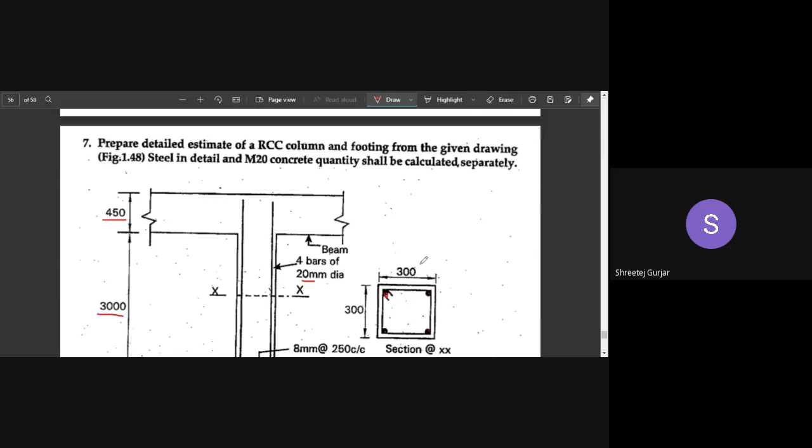So let us look into what are the reinforcement that is provided. So we can see 4 bars of 20 mm diameter, right? 4 bars you can observe here, 1, 2, 3, and 4. 4 bars of 20 mm diameter are provided at each corner. And then looking at your lateral ties, they are 8 mm in diameter and 250 mm center to center. So lateral ties start from here, okay, start from here and they end over here, at the top of your bar. So that is for your lateral ties and your column reinforcement.

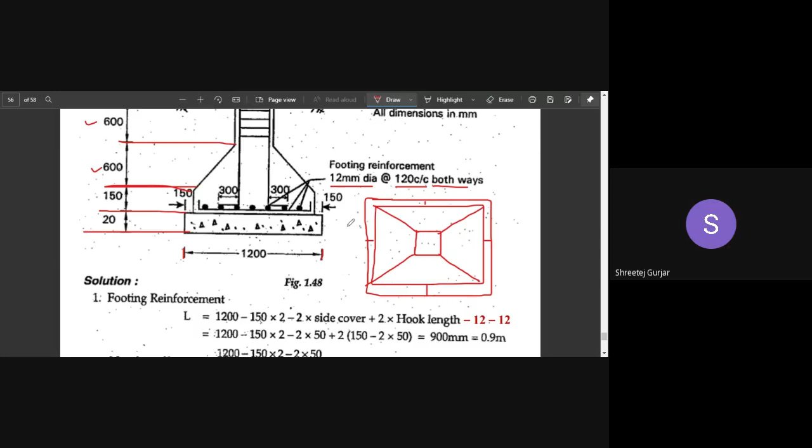Moving on to footing reinforcement. So footing reinforcement, we have 12 mm dia bars, 120 mm center to center distance in both the ways. Okay, in both the ways, meaning in this direction as well as this direction. Both are 12 mm diameter bars at 120 mm center to center. Okay, so this is regarding your problem statement. So I hope whatever is given is clear. So we'll move on to the solution.

Coming to our footing reinforcement calculation, we will calculate the footing reinforcement first, and then we will look onto the concrete calculation, because it is a trapezoid, that is a bit tedious. The first thing we will cover is the reinforcement calculation.

We'll start from the bottom, for the footing. So the length of your bar, you can observe here, PCC width is 1200 by 1200, but it is offset by 150 mm on each side. So minus 150 into 2, that is 150 here and 150 over here, and then minus 2 side covers.

Cover we will assume as 50 mm on both the sides. So minus cover, and then plus 2 hook lengths. This is your hook length. That is how you can calculate the length of your footing reinforcement.

So how do you calculate this hook length? It is the overall depth, which is 150 mm. From the overall depth, you minus 50 mm cover at the top and minus 50 mm cover at the bottom, similar to what you have done in the previous numerical. So neglect this, it is not required.

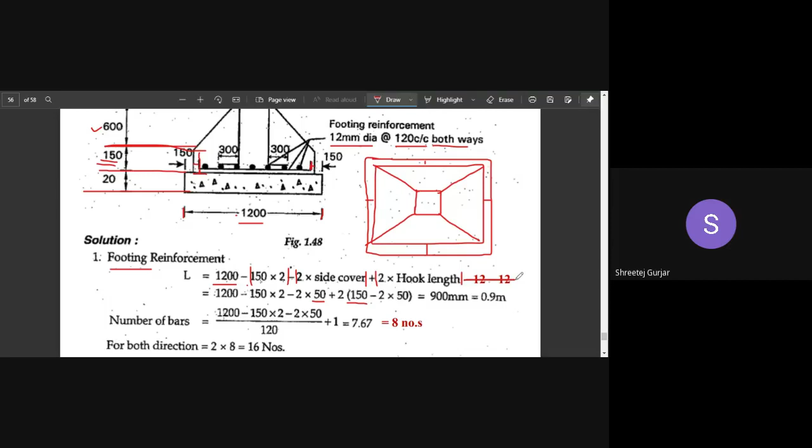So you get the length as 900 mm. Length of your bar is 900 mm, and then the number of bars that is required.

So the length is 1200 mm, minus this offset, that is 150 mm on each side, minus your cover on each side, and this is your offset on each side, divided by spacing, which is 120 mm, given. So you get number of bars as 7.67, so you can assume 8 number of bars.

These are in both directions: 8 number of bars in this direction and 8 number of bars in this direction. So totally 16 number of bars we require in the footing. So we are done with the footing calculation.

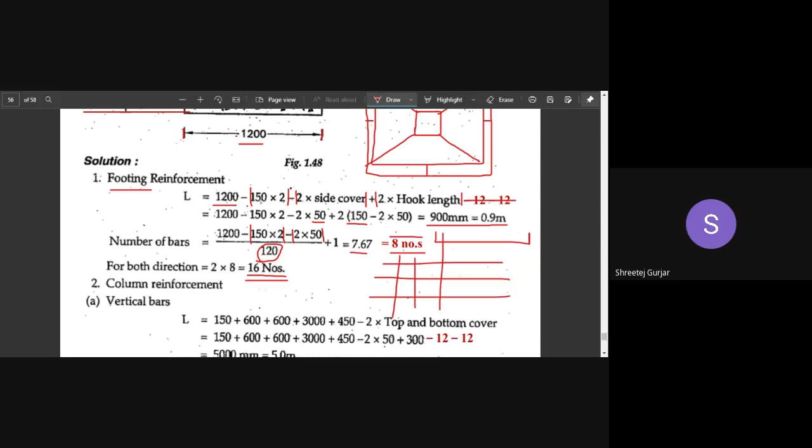Now moving on to column reinforcement. After footing, we'll calculate for the column. I've told you the length of the column from where it starts and where it ends. Once again I will show you, it will start from here and it will end over here at the top of this bar.

You can calculate this length and then add 300 mm. I'll tell you how much it is: add 450 plus 3000 plus 600 plus 600 plus 150, you will get up to here. Then minus this cover, minus 50 and minus 50 over here.

Then this bar diameter you need to minus, that is 12 mm, and then this bar diameter you can minus, that is 12 mm. So you will get the straight length, that is from here to here, and then add this 300 mm. So you will get the total length of this longitudinal reinforcement bar.

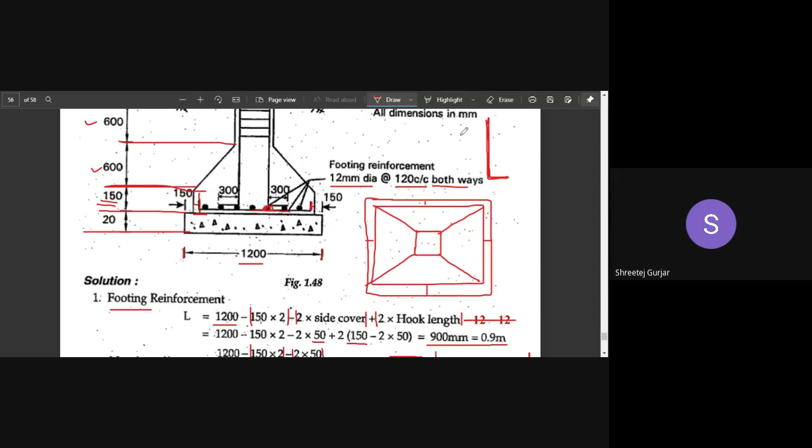So how many number of bars? 4 number of bars, 1 bar at each corner. So 5 meter is the overall length of this longitudinal bar, that is what we have done here.

Then moving on to the next thing, that is the links required for your column. You can calculate A, you can calculate B, similar to what we have done in the previous numerical. So the overall size of our column, how much it is? It is 300 by 300, it is a square column.

So what we can do is, 300 mm, it is like this, 300 mm. So minus 2 sides cover, this cover and this cover you minus, and then this bar diameter half and this bar diameter half.

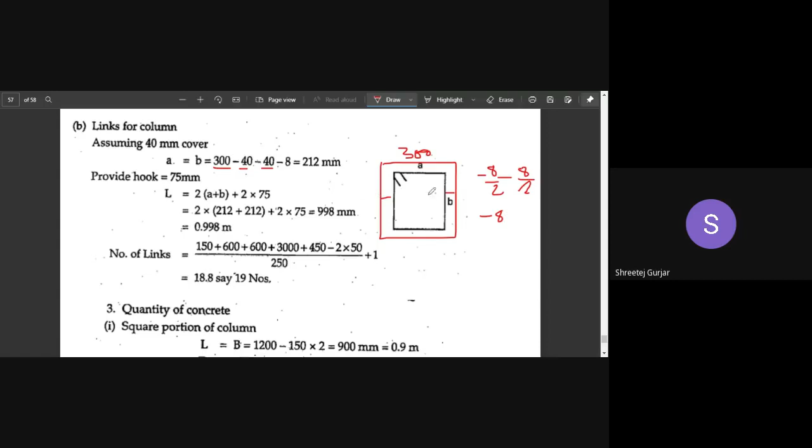So lateral ties are of 8 mm diameter, right? So minus 8 by 2 and minus 8 by 2. Totally, if you add this, it will be minus 8. So 300 mm is the overall, that is what we have written here, minus 40 mm cover on each side. So 40 mm cover for column, we have assumed. So 40 mm here, 40 mm here, and then minus 8 by 2 and minus 8 by 2, that is your lateral tie diameter.

So you will get A length as 212, and since this is also 300, this B length will also be the same. So A is equal to B. Then hook length we need to add, this is 75 mm and this is 75 mm. So 2 into 75 mm plus 2 times A plus B. So the overall length of your lateral tie is almost equal to 1 meter.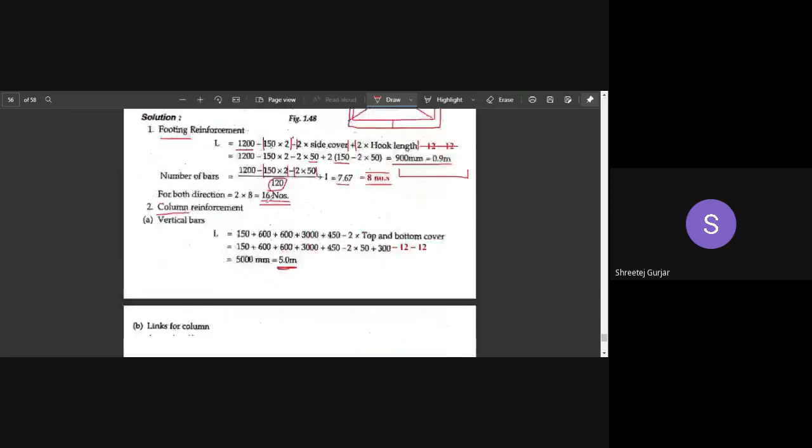Now the last thing we need to calculate in reinforcement is the number of lateral ties or number of links. I've told you the length we need to consider, and that divided by the spacing of your lateral ties, that is 250 mm, plus 1, and if you do that, you will get the number of links required as 19. So I will show you the length required, you have to start from here and end over here, that is the length divided by the spacing, 250 mm, plus 1. You will get the number of lateral ties as 19.

So now we are done with the calculation of reinforcement. Then the next thing we need to calculate is the concrete quantity. In the square portion of column, that is this cross section, we have some concrete of this column. So it is 300 by 300, into this height of your column.

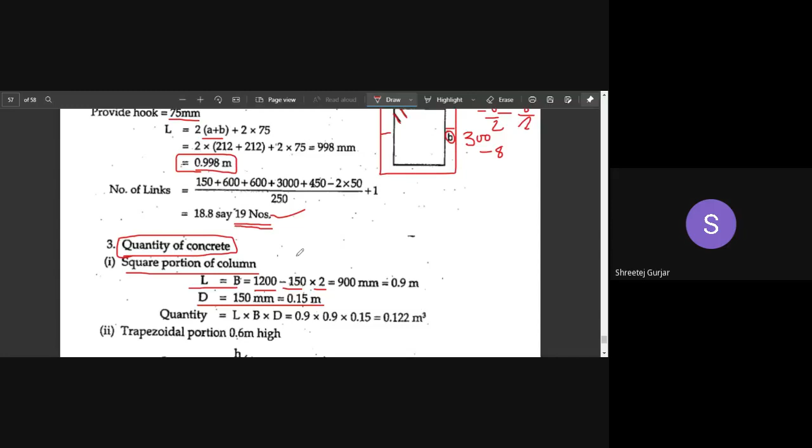So what they have done over here is the square portion of the column, so length is equal to breadth, right, minus this offset on each side. Let me show you which part they are considering. So depth is 0.15 meter, and the part they have considered is this straight part in your column. So they have divided your column footing into this box, this straight part which we will calculate separately, and then this trapezoid we will calculate separately.

So now we are calculating this bottom part. The depth you can observe is 150 mm, and the length of this is what? It is 1200 minus 150 over here and minus 150 over here, you will get the length, and the depth is 150 mm. So we have covered this bottom part.

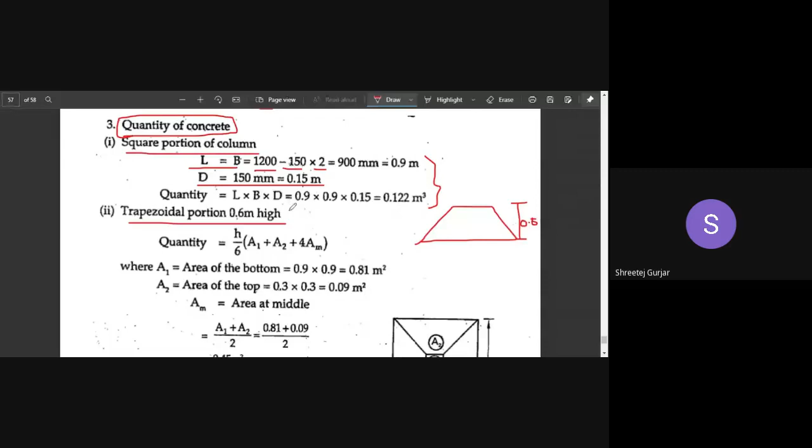Now we need to cover this top part, which is like a trapezoid. So how do we calculate for that? This quantity I've told you we calculated for the bottom part, and now the trapezoidal part. The height of this trapezoid is 0.6, you can observe in the figure. Then we will divide the trapezoid into different parts like this.

So this is your top view, this is your A1, which is your concrete column, and this is your A2. A1 I've told you, they have mentioned it reverse I think, so A1 we will consider the area of the bottom, and A2 we will consider the area of the top. So area of the bottom is this thing, it is 1200 minus 150 minus 150, so it is 0.9. So A1 is 0.9, and A2 is this column, that is 0.3 into 0.3, so it is 0.09 meter squared.

So A1 and A2 we have calculated. Now we will calculate the area at middle, the average thing. So A1 plus A2 by 2, we have calculated A1, we have calculated A2. We will take the average and write that as middle or mean, AM.

So why do we calculate this AM? Because we have to substitute it in this formula. In this formula we have AM. So now we have calculated A1, A2, and AM, and the height of this is 0.6.

So now we can substitute all of this, that is H by 6, A1 plus A2 plus 4 into AM. So we get the quantity of concrete in the trapezoidal section as 0.27.

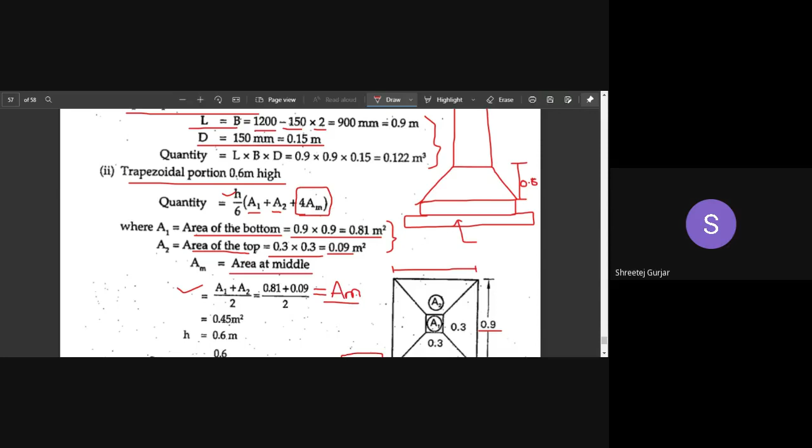And because of that we will not consider this PCC, because it is not made up of M20 concrete. PCC in the sense it is plain cement concrete, it is not M20. So we have calculated for column, for this, and for this. So that is done. Now for column we have to calculate.

So height of column is 3 meters, and the dimension is 0.3 by 0.3, the column size. The length of your column is from here, this is your ground level going up to roof, that is your bottom part of your beam. So this is your beam, you have to go up to the bottom part of your beam.

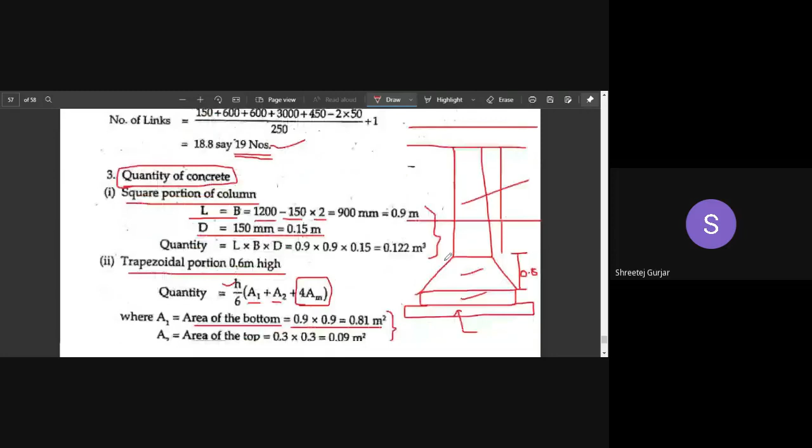This is 3 meters, and this is how much? This is 0.6, I guess. So 3 meters your floor to floor height plus this 0.6 from here to here. So that 0.6 you need to add, you'll get the length. And then this is the cross section, which is a square, 0.3 by 0.3. If you multiply length into breadth into depth, you will get the total quantity of concrete in column.

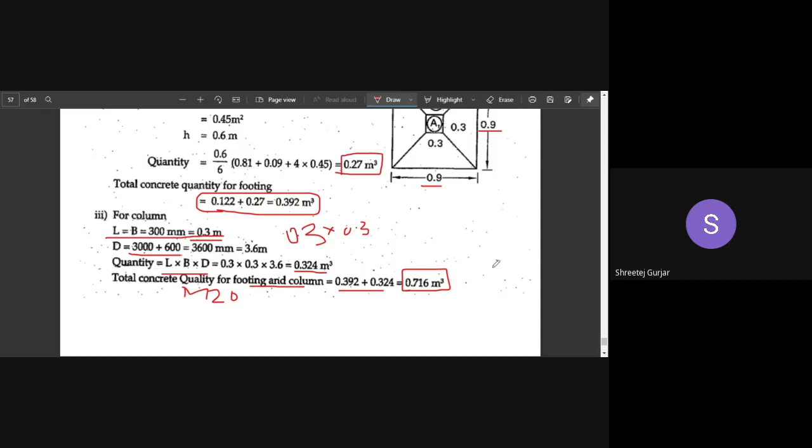So the total quantity of concrete, that is M20 concrete in footing and column, you need to add both of them. You will get the total quantity of concrete in footing as well as your column. So we are done with all of the things. Now the last thing left out is the preparation of the table.

Only mention the reinforcement over here, do not mention the concrete quantities. So in the footing, we have 12 mm diameter bars at 120 mm center to center in both the ways. Our table is a bit lesser in size because if we had different reinforcement in different directions, we would have mentioned them separately, and then the table would have increased in size. So since they are same in both the ways, we can mention them in the same row.

So the diameter is 12. The number of bars required is 16, that is 8 mm, 8 number of bars in each direction, so totally 16 number of bars in both directions. The length we had calculated is 0.9 meters. The weight per meter we know is 0.89. So multiplying number into length into weight, we will get the quantity in kg. So that was for your footing.

Now moving on to your column reinforcement. So your longitudinal reinforcement bars were 4 in number, 4 at each corner, and the diameter of your bar was 20 mm. The length which we had calculated was 5 meter. So you have to multiply 4 into 5 into weight per meter, you will get the quantity in kgs.

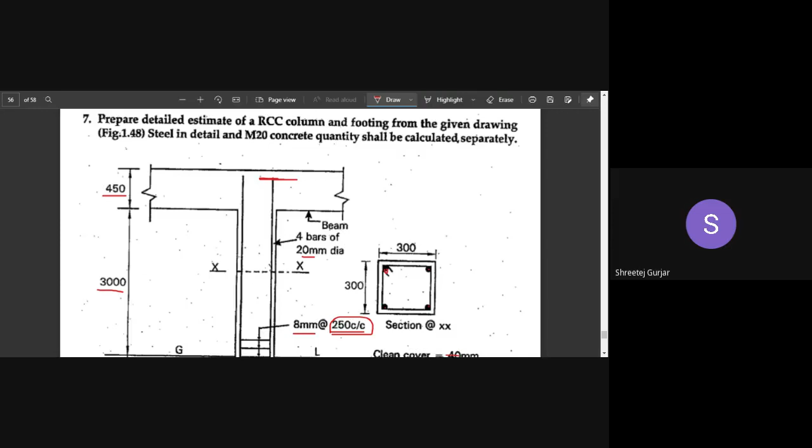So estimate is never right or wrong, but the main thing that you need to consider is the number of junctions, in your center line method, wherein if you go wrong while calculating the center lines, or if you go wrong during calculation of your number of junctions, then your entire thing will be wrong. So make sure you do not make a mistake while solving your problem in the initial stage, when calculating your center lines, or your number of long walls, number of short walls, and number of junctions. Do not make a mistake in the initial stage, or else our entire numerical will go wrong.

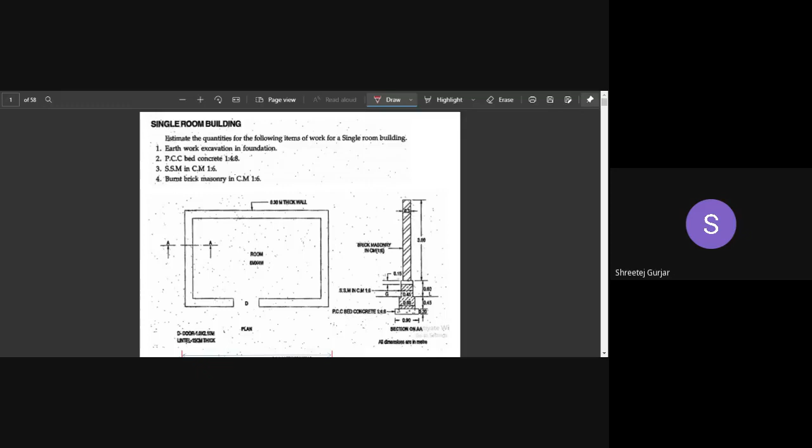So one thing I would like to mention again and again, that you need to practice. Without practice, these numericals are very tough to solve. So make sure you practice a lot. I will give you a lot of practice problems. Do solve them, and then it will be very easy for you to solve in exam, because in exam you will not have much time.

Your estimation, you need to prepare at least minimum, maximum in at least 15 minutes. Maximum you can go up to 20 minutes. Over that, if you go, you will face a shortage of time for other modules. So practice is required so that you solve your numerical in time. If you do not practice, your time that you require in exam, it will be more. So practice is important regarding the first module and as well as the second module. I hope everyone has typed in their attendance.